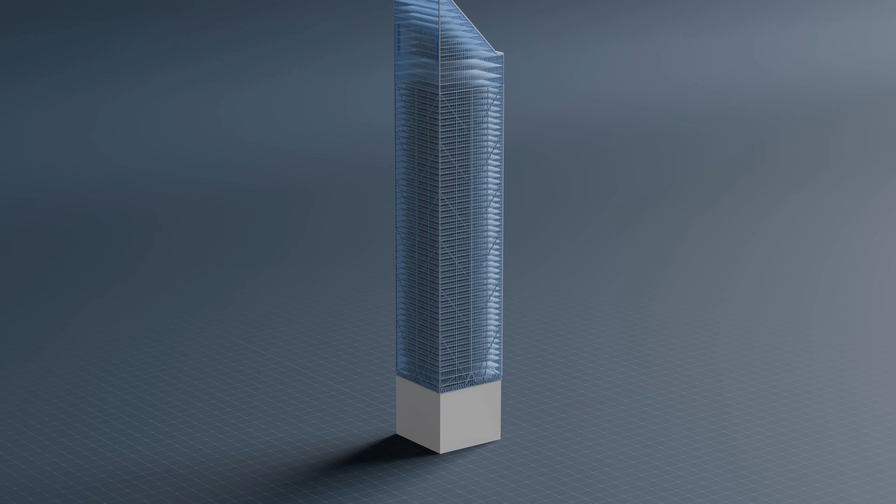Citicorp then hired architect Hugh Stubbins to design the tower and the church, and Bill LeMessurier as the structural engineer. Stubbins explained the constraints they faced. The church needed to be in the exact same spot, and they needed to build the tower around it. If they were to maximize the floor area, they would have to notch out one corner of the tower for the church.

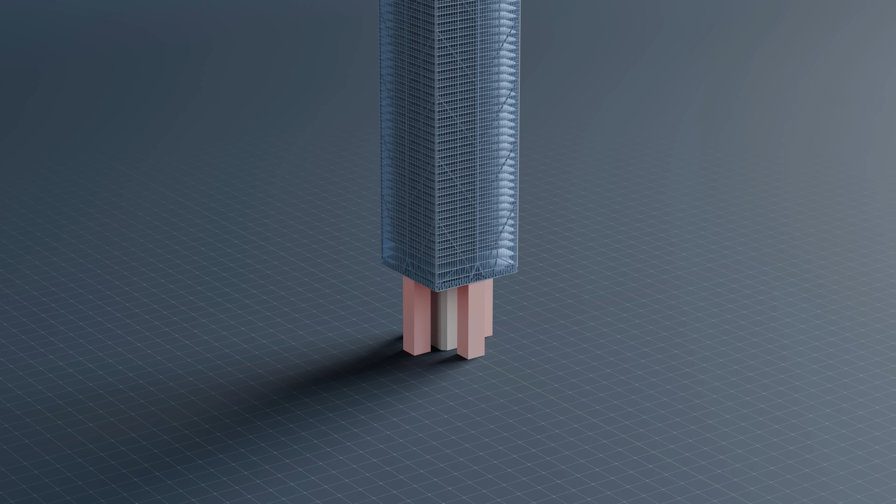LeMessurier agreed that could work, but why not notch 2, 3, or even all 4 corners, essentially constructing the skyscraper on stilts? So it's probably the first time in history that an engineer has come to an architect and said, "Let's make our job harder for us." The stilts would serve 2 main purposes. First, they would need to support at least half of the building's gravity load. The rest would be held up by a larger central column. Second, they would need to withstand the load due to high winds.

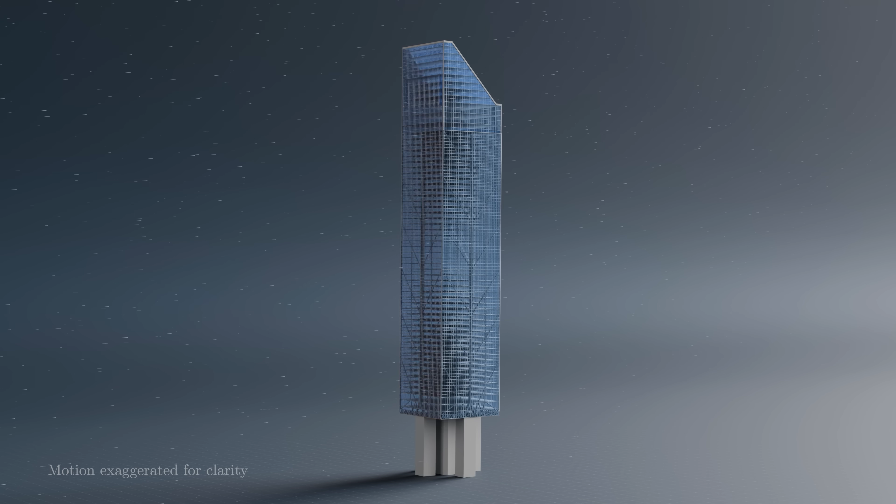But unlike an ordinary structure, the stilts wouldn't be at the corners. They would be at the center of each face. Imagine a chair, and instead of the supports on each corner of the chair, it's at the midpoint of each side. Obviously, it's not an ideal situation. It doesn't seem very stable. Exactly. So it created an engineering problem.

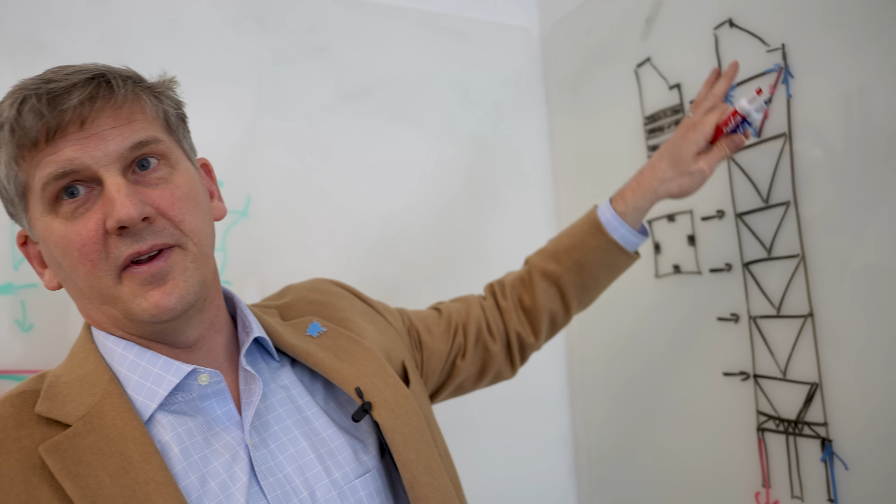As LeMessurier considered the problem, he suddenly had a flash of inspiration. He grabbed a napkin and sketched out an idea. He drew 6 layers of diagonal braces up each face of the tower. These chevrons would transfer the forces to the middle of each face and down to the stilts. Now we have to see the gravity loads, right? But now here's the trick. The gravity loads are coming down the column. When they get to the brace, they need to find their way into the brace.

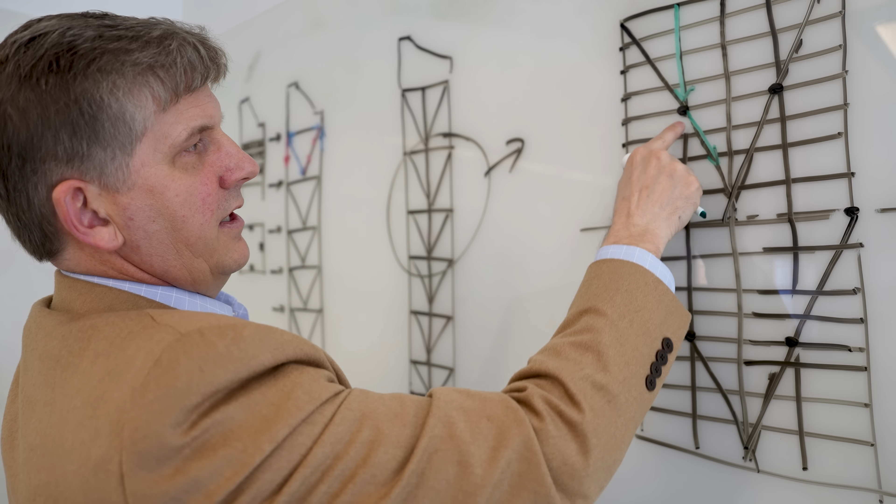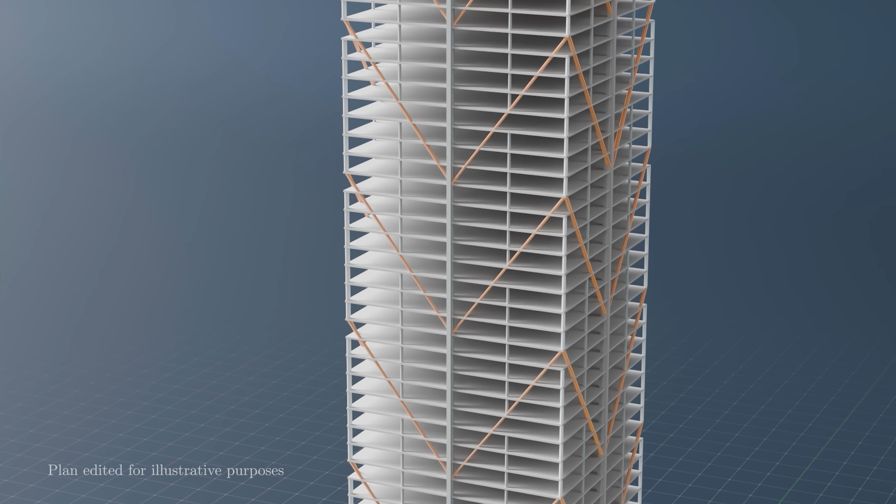Okay. So what you do is you take out that column right there. There is no way that load can jump over and go to that column. And now they're coming down into the braces. They get down to the bottom here, and now they continue to go down. You take that column out. It has nowhere to go except into the brace. By removing the columns at the top and middle of each chevron, every tier acted as a separate unit. They were only connected to the braces and through the central core. So every 8 stories, half of the gravity load would be forced through the chevrons to the mid-face columns, leading down to the stilts.

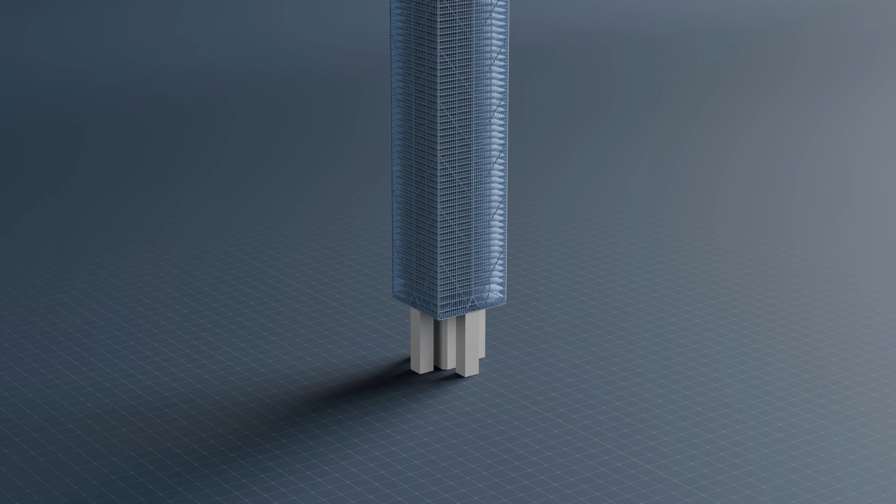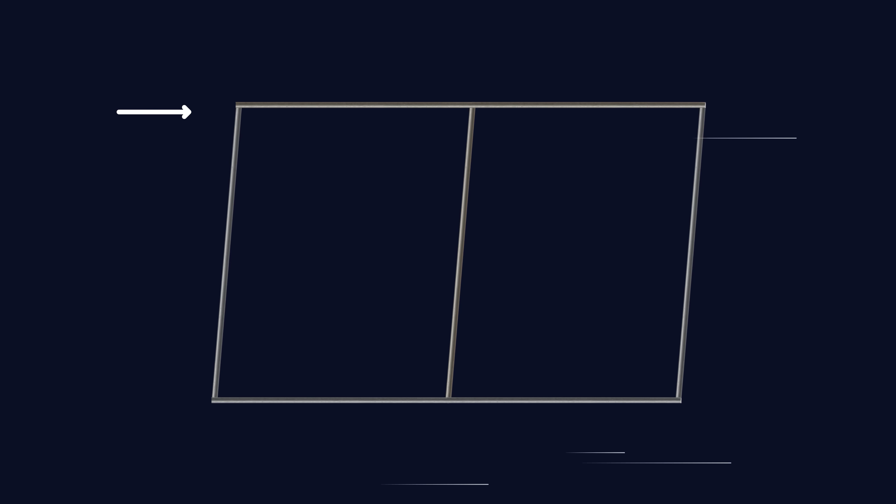Can you tell me how big of a new idea was this? Yeah, well, this particular system was entirely unique, driven by the placement of the columns, driven by the conditions of the building. Satisfied the chevrons could transfer the gravity load, LeMessurier turned his attention to the second problem, the wind. When wind hits the left side of a normal building with corner columns, the entire frame deforms like this. So to reduce this deformation, we could strengthen these joints. But there's a better way.

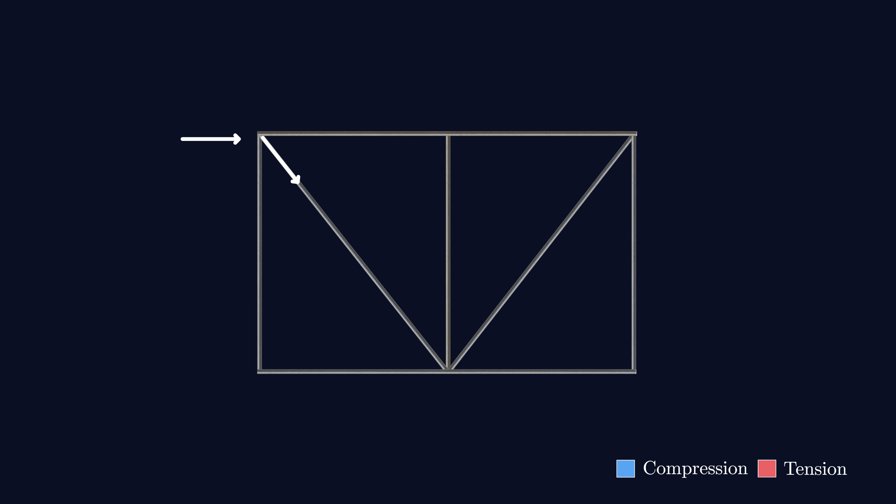Because beams and columns are much stronger in compression or tension than they are with bending loads. So if we add diagonal bracing, they can carry this horizontal load. The beams sort of act like springs, and when they're compressed, they push on the joints. When they're stretched, they pull inwards.

With braces like these, the wind load compresses this diagonal and stretches this one. The left column pulls down in tension, and the right column pushes up in compression. Where the braces meet, they both push the bottom beam to the right. This stretches the left side and compresses the right one.

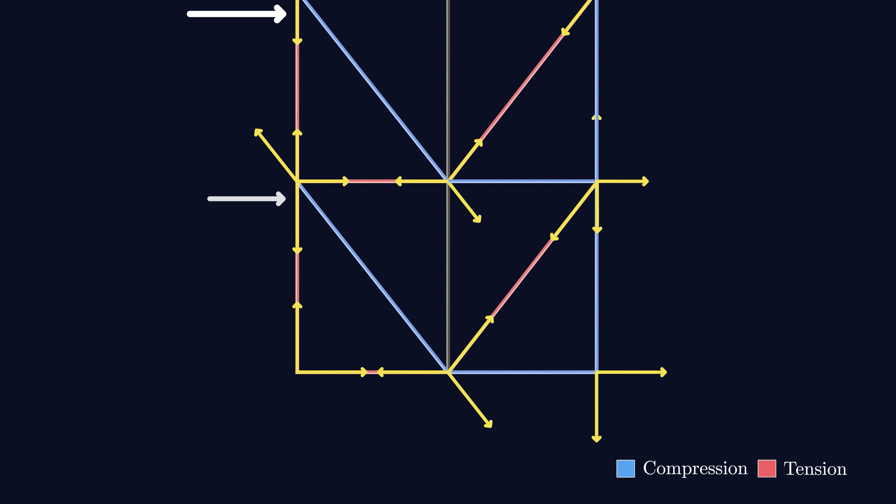But this floor is the top of the next chevron, so this lower section is carrying the force from the layer above it and the normal wind load from the side. And this keeps happening at every chevron, so the wind load builds up as you go down the building.

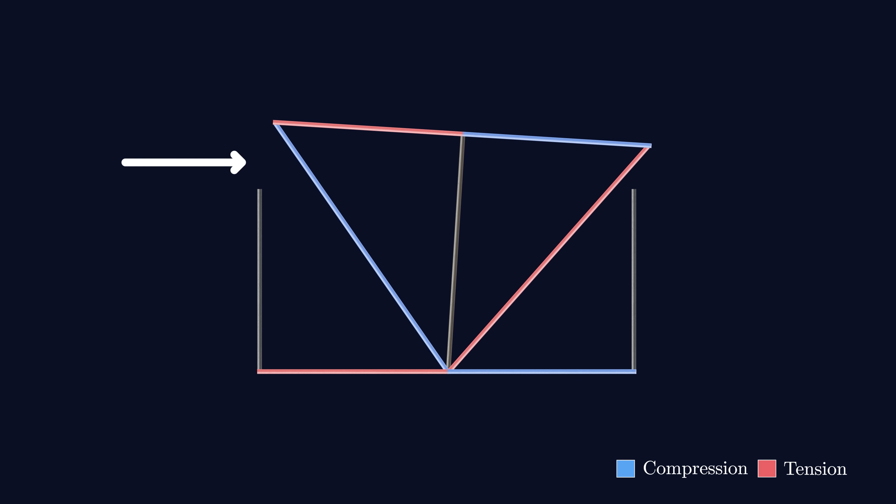But Citicorp can't have corner columns like this because of the gravity load. So in the wind, this entire triangle wants to rotate like this. And to prevent that from happening, this chevron pulls down by going into tension, and the far chevron pushes up in compression. The top and bottom beams are again forced into compression and tension. The wind load ends up wrapping around the entire building, so every chevron works to transfer the wind load to the section below.

When we think about skyscrapers, how big of a deal is wind? If we made a skyscraper here out of all these different things, you push with your phone, you get a certain amount of force. But then you push on my phone as well with a certain amount of force, but your phone is also pushing on my phone. And so that's the shear in the building, what we call the building shear. It increases as you go down the building.

At the 10th floor, you may have a smaller force than at the 60th floor, but the total force of the 10th floor is like carrying everything above it. So it's much bigger than what's going on at the 60th floor.

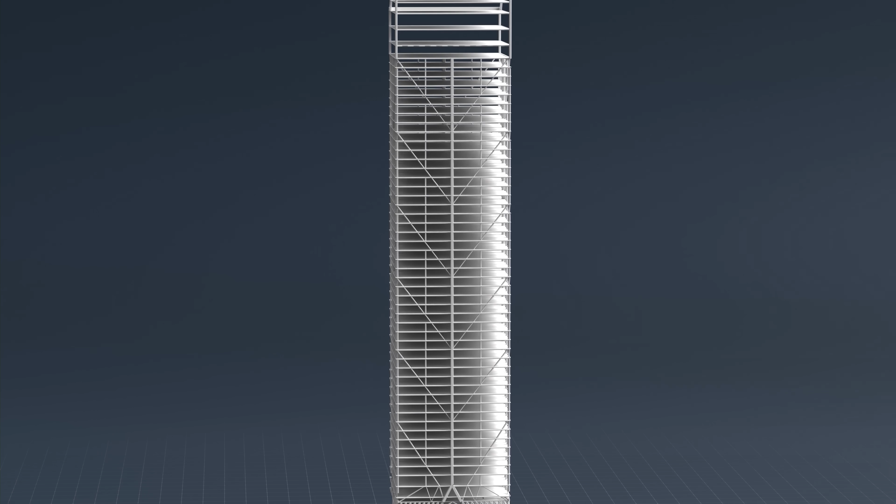So these chevrons were key to LeMessurier's design. But the braces were massive, almost 40 meters long end to end. So even if you could fabricate a steel brace that long, there would be no way to get it through Manhattan. So instead, it was sent in pieces to be welded together on site. The chevron bracing solved the wind and gravity load issues, but it also created a different problem.

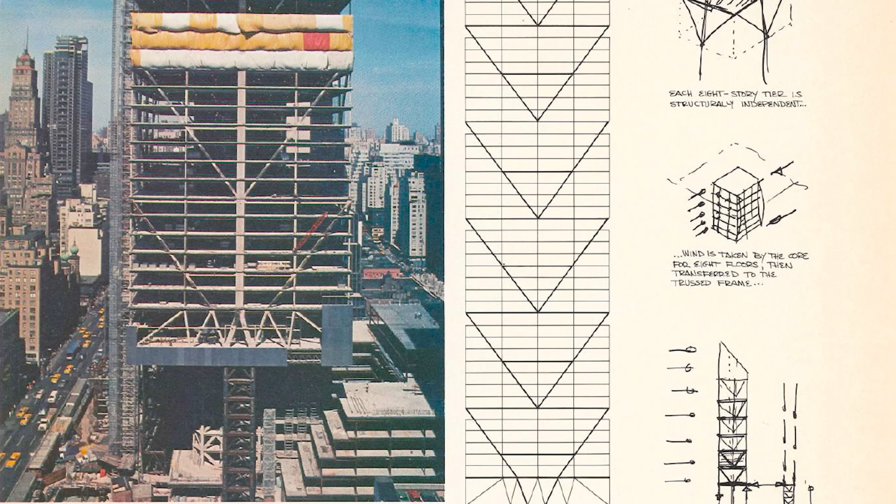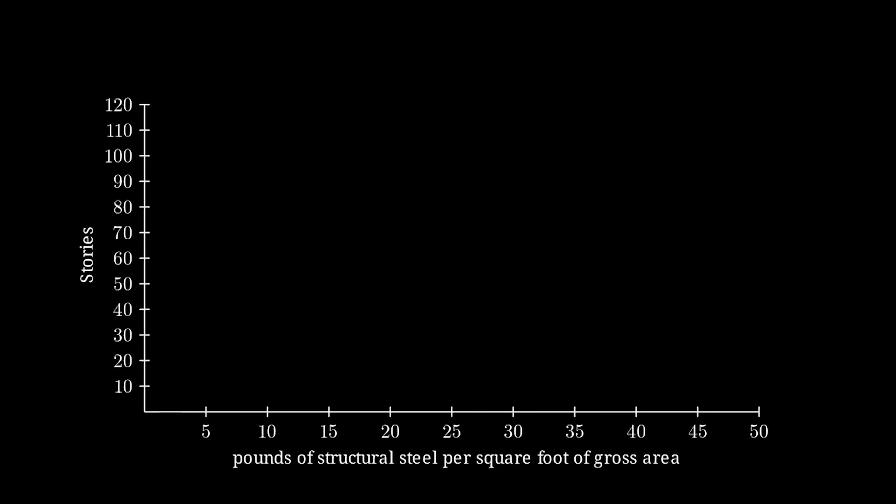Because of the chevron bracing system, they were able to save a lot of money and weight. It was a lighter construct than most other buildings in New York. I think it was 22 pounds a square foot, which is very light. Unfortunately, that made the building swayable. It could move in the wind. That wasn't necessarily a structural problem. It just could have been uncomfortable for the patrons.

The way they could solve this was just, let's add more structural steel and make it a lot stiffer. But the solution that LeMessurier came up with was far more elegant. He adopted something that had been regularly used in bridges, power lines, and ships, but never before in a building: a tuned mass damper, or TMD.

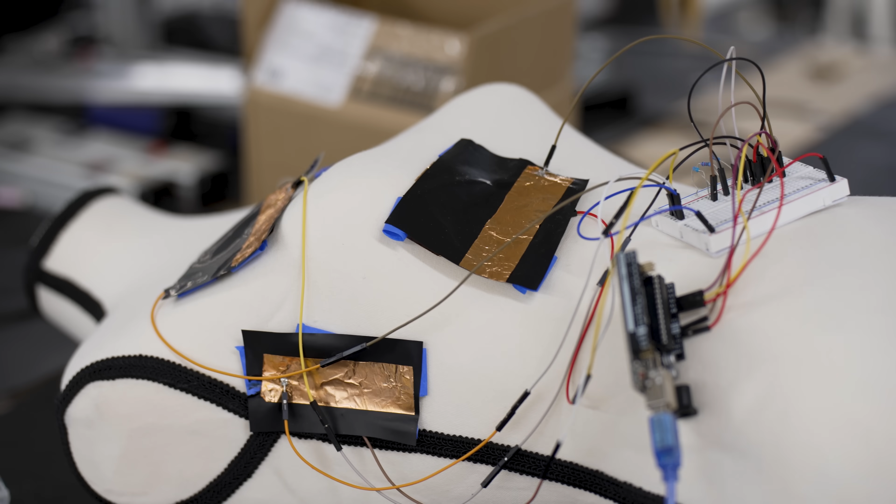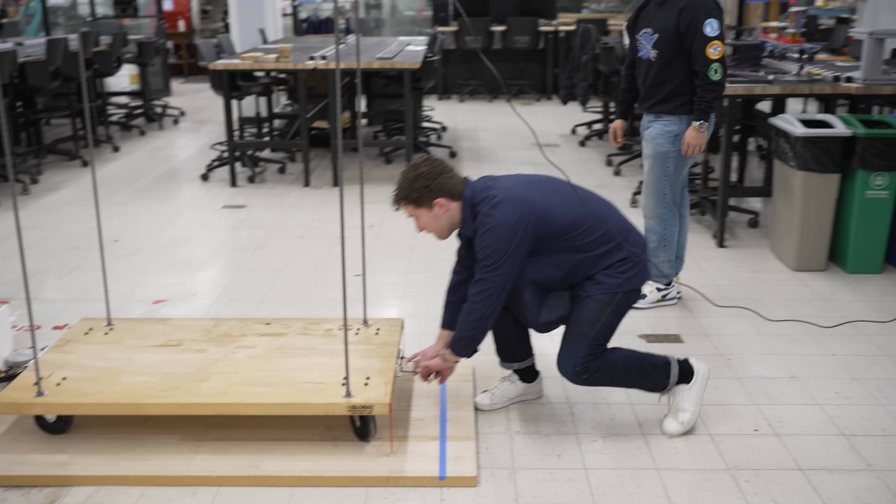So we're here at Stark Laboratories, and I'm not with Iron Man, but instead the Columbia Space Initiative, a student team here on campus who has helped us build this incredible tuned mass damper kind of system. We'll use this cart to represent a building. By pulling it back and releasing it, we can excite its resonant frequency. And then we'll put on a little pendulum, an aluminum rod, and a mass at the bottom.

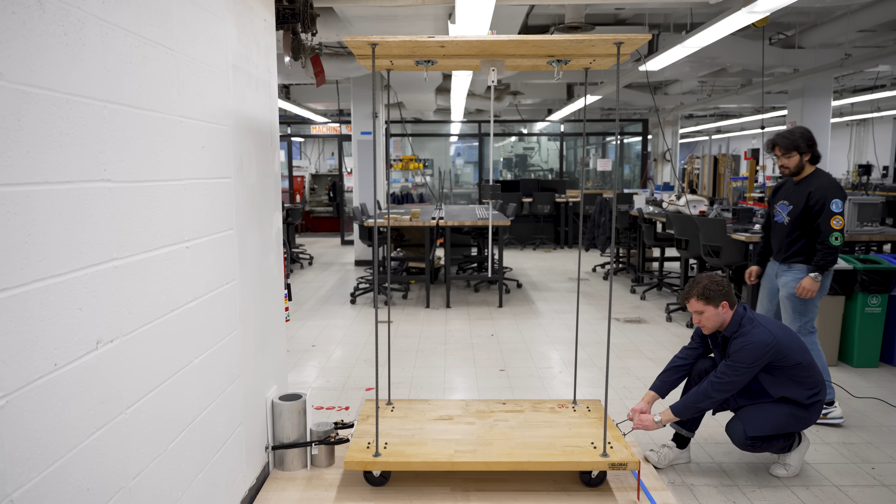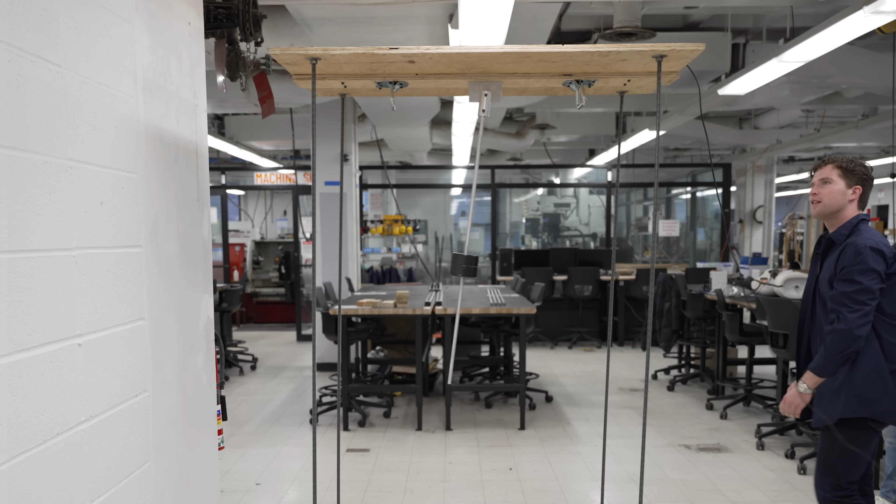As the building sways, it transfers some of its kinetic energy to the pendulum, which starts to swing. Then some of its energy is dissipated through friction at the hinge. The pendulum and the building oscillate out of phase from each other, so every time the building pulls the pendulum in a different direction, more energy is lost, significantly damping the sway of the tower. But this system needs to be carefully tuned so it has the same frequency as the building itself and the right amount of friction.

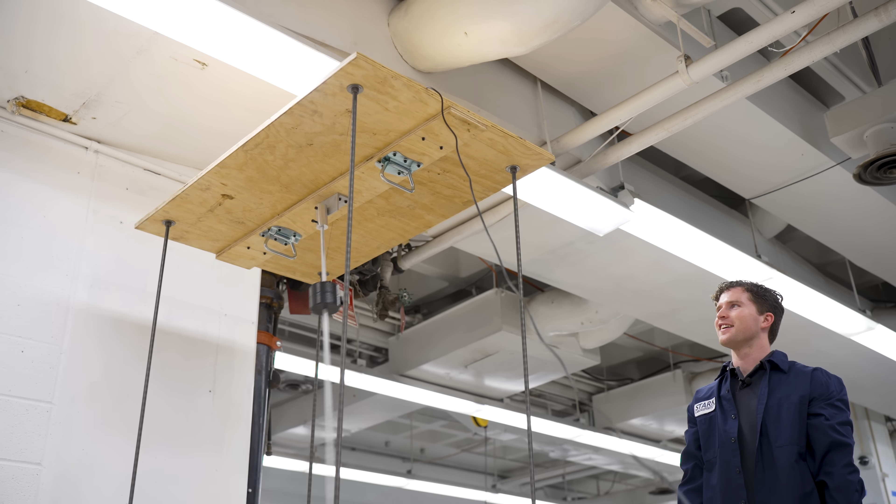So first, the mass needs to be at least 1 to 5% of the building's weight to be effective, and we tune the frequency of the TMD by adjusting the length of the pendulum. I assume engineers do math around this thing, but we're just doing it by feel.

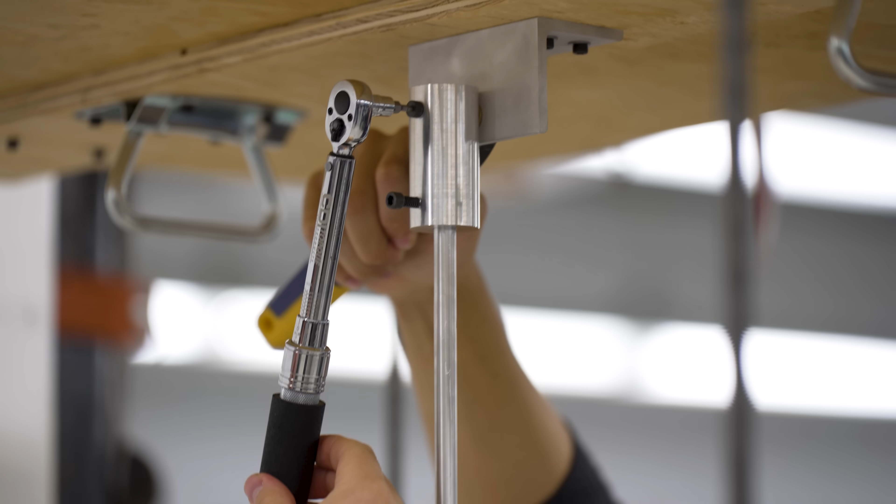Second, by loosening or tightening the bolt, we can tune the amount of damping. We need to dissipate more energy from friction at the hinge to stop the swaying faster. We just tighten this top bolt to add a little bit more resistance to the whole system. And we'll see if we can dampen it now further.

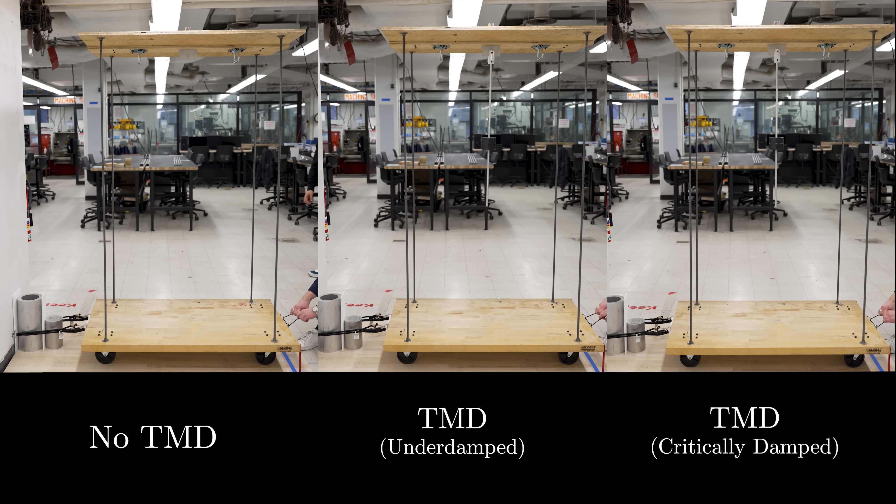Ooh, much different, yeah. Yeah, that looked great. That was so quick. Yeah, that was. It is cool when an experiment works.

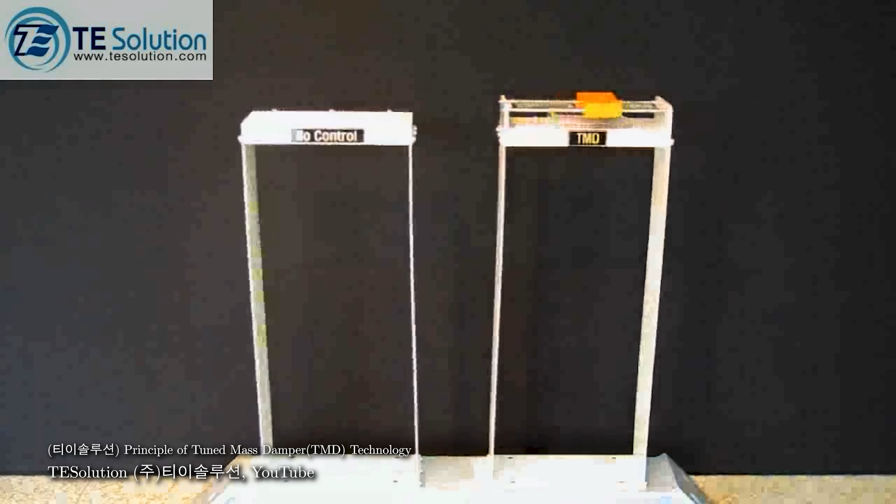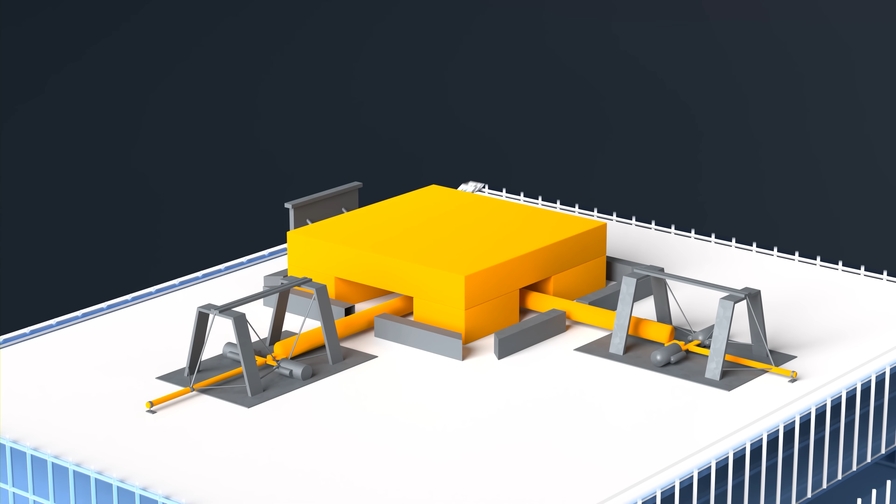Does not always happen. There are many different types of TMDs, like pendulums, liquid columns, and a large mass on springs. LeMessurier used this last one in Citicorp. What you see is a mass of concrete, which is 29 feet square, and about 8 feet thick and weighs 400 tons. It was installed on the top floor, and it's affectionately known as that great block of cheese.

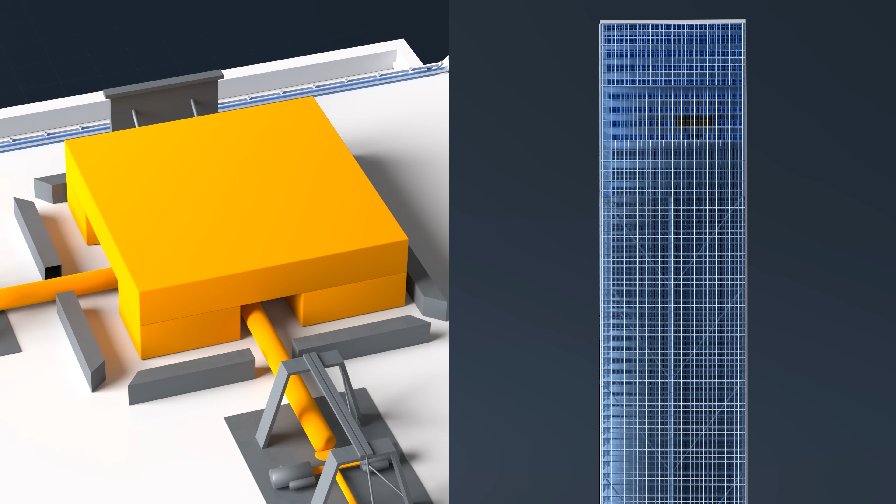As Citicorp sways to one side, the block starts to move in the same direction. Some energy is dissipated through separate viscous dampers. Citicorp's oscillations are damped through those energy losses as the block oscillates out of phase to the building's motion. LeMessurier expected the damper to reduce the amplitude of swaying by roughly 50%, and he saved around $4 million by not needing an additional 2,800 tons of structural steel.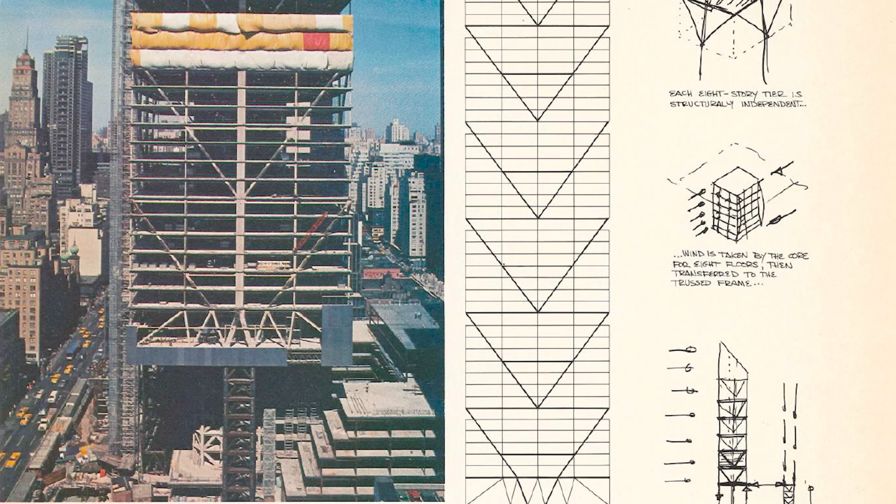With both the chevron bracing to channel forces to the stilts and the tuned mass damper to reduce sway, Lemessurier was convinced the building was structurally sound. On Citicorp Center's opening day in 1977, it was the 7th tallest building in the world. It was described by the press as an acrobatic act of architecture.

Later, the American Institute of Architects even gave it an honor award, calling it a tour de force as a stylish silhouette in the skyline, and for the pedestrian, a hovering cantilevered hulk. So then it's going swimmingly for years, right? Well, it's going swimmingly for about a year. But the first hint of trouble came in May 1978.

Lemessurier was talking with another client about welding similar chevron braces. The architect and the steel fabricator said, "Tell me, how did those welded braces work out? Seems like overkill," they thought. And Lemessurier says, "Yeah, they were fine. Let me call my guys in New York and I'll check."

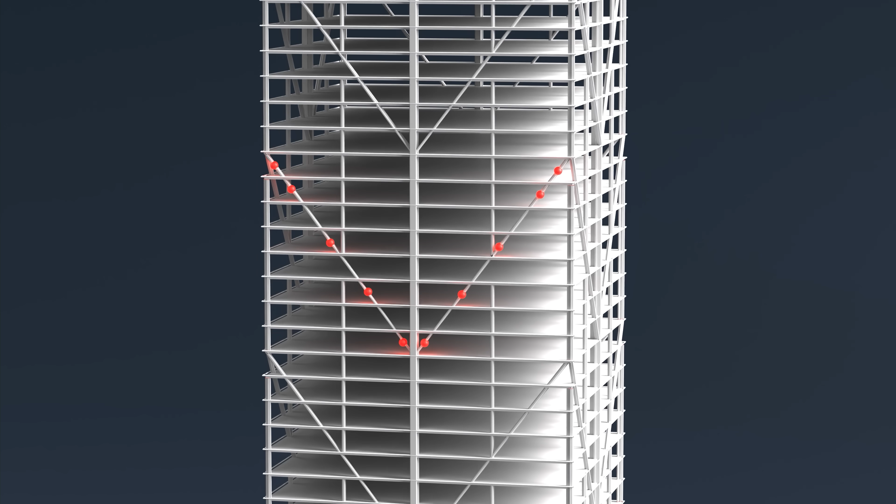So he puts a call into his office in New York, and they say, "Oh, Bill, didn't you know? We bolted those connections." The contractor had suggested saving $250,000 by using bolts to attach the braces instead of welds, and Lemessurier's firm had agreed. There is nothing that says a bolt is inherently worse or better than a weld. You use them in different circumstances for different reasons.

But it's a little surprising to find out. I thought the connections in this tour de force, one-of-a-kind skyscraper, that's on the cutting edge of structural engineering, were connected one way, but apparently it's connected another way. But if the braces are going like this, where are they going to go? You only need the weld when the braces are going like this.

Since the gravity load was always compressing the braces, some of the chevrons only went into tension under very high winds. And even then, it wasn't a lot of tension. Lemessurier trusted that his team did the right calculations, and the substitution was fine, logical even.

But around a month later, Lemessurier got a phone call from a student who wanted to ask some questions about the Citicorp Center. And his teacher said to him, "That engineer didn't know what he's doing, and nobody should put the columns in the middle, they should put them in the corners. That's silly." And I told the student, I said, "Well, your professor's full of it. He doesn't understand the problem we had to solve." Lemessurier went through the calculations with the student to reassure him the stilts were in the right place.

But the interesting thing is in that moment, he's thinking about wind loads from all directions. Late spring, early summer of 1978. Bill Lemessurier is working on the Back Bay Hilton Hotel that in plan forms a triangle, not a rectangle. Now you got a triangle, what's your orthogonal direction? You just have to give up and say, we're going to analyze it from every direction. That's going on the moment that Bill Lemessurier gets this phone call.

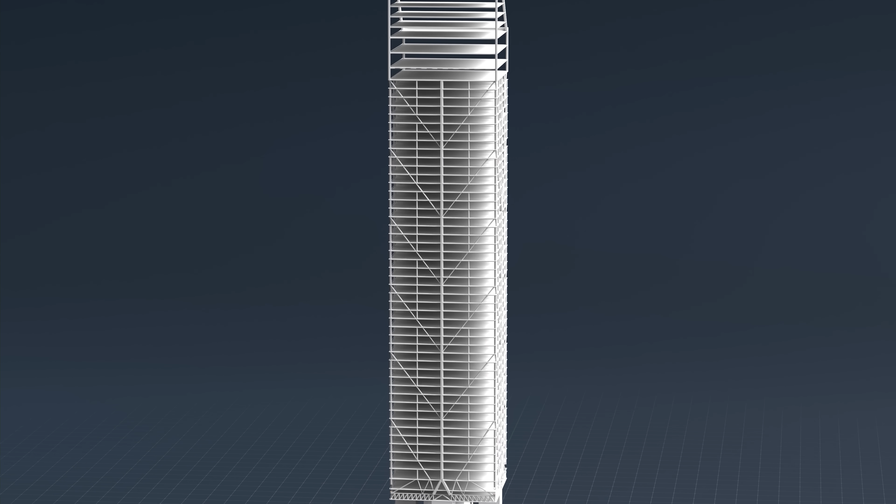Compared to Lemessurier's calculations for the perpendicular wind load, the forces here were 40% higher. So 1.4 by itself is not enough to wreak havoc, okay? It may be, but it may not be. Okay. So then the question is, well, what happens? This increase in forces wouldn't have mattered in the original design since the chevrons were fully welded together. But that wasn't the case anymore.

Lemessurier remembered his earlier phone call. The welds holding the chevrons together were swapped for bolts. How did his team calculate the number of bolts per joint? Did they consider quartering winds? It would be a miracle if they ever thought that through, to think about the diagonal wind. It just wasn't in the nature of anybody. So I had a bit of a worry. I didn't panic right away, but I decided to go down to New York to my office.

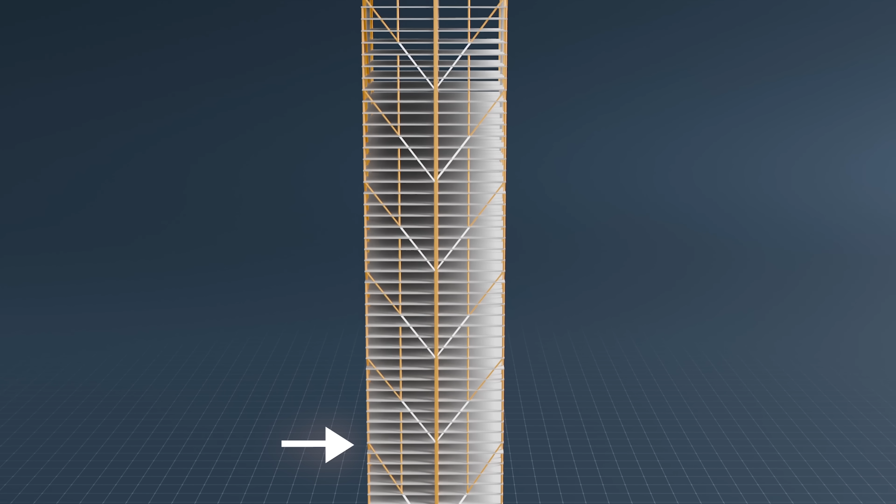Lemessurier requested the building diagrams and pored over all of the connections. He looked at how his firm calculated the number of bolts. There was no question they had taken the straight-on wind, not the diagonal wind. Although wind speed is highest at the top of the tower, the wind shear builds up as you go lower.

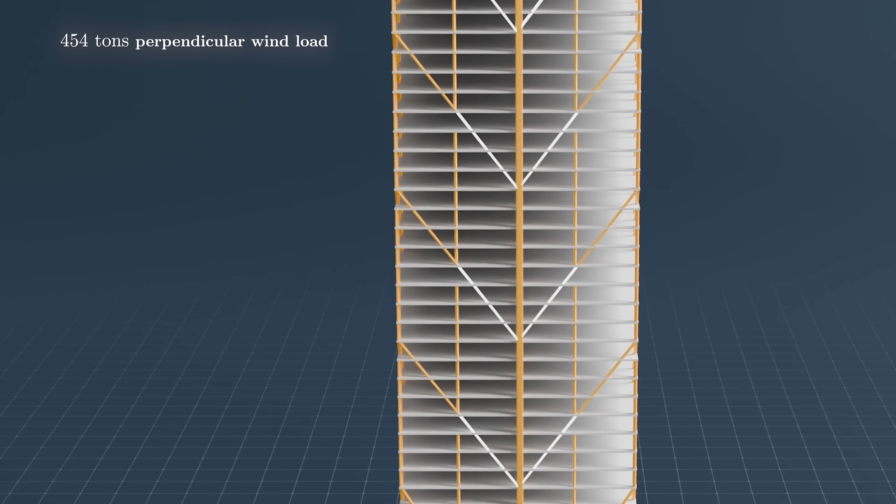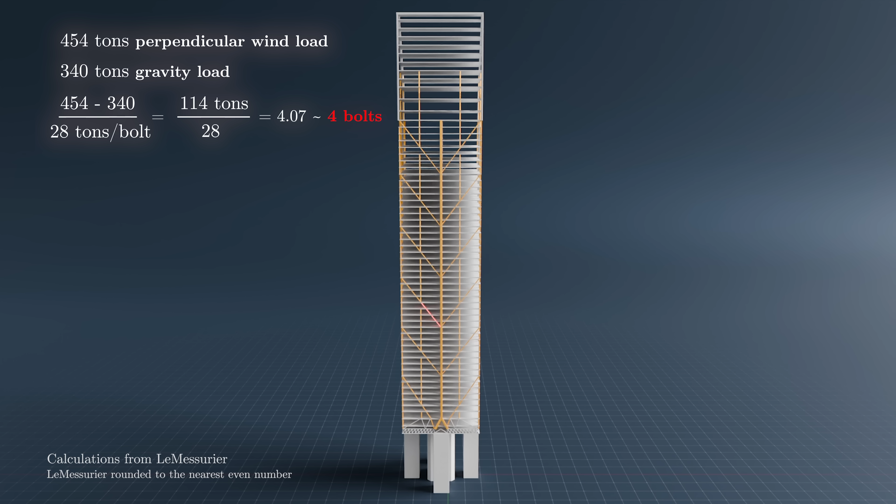Looking at this brace around halfway down the tower, the perpendicular wind load is 454 tons. Because of the skipped columns, all of these braces carry the same gravity load, just 340 tons, from the 8 stories above. The gravity load builds up in the center column, not in the braces, which means there are 114 tons of tension in this brace. If each bolt can withstand around 28 tons, that would require 4 bolts. The original calculations said just 4 bolts were enough, so that was all they used.

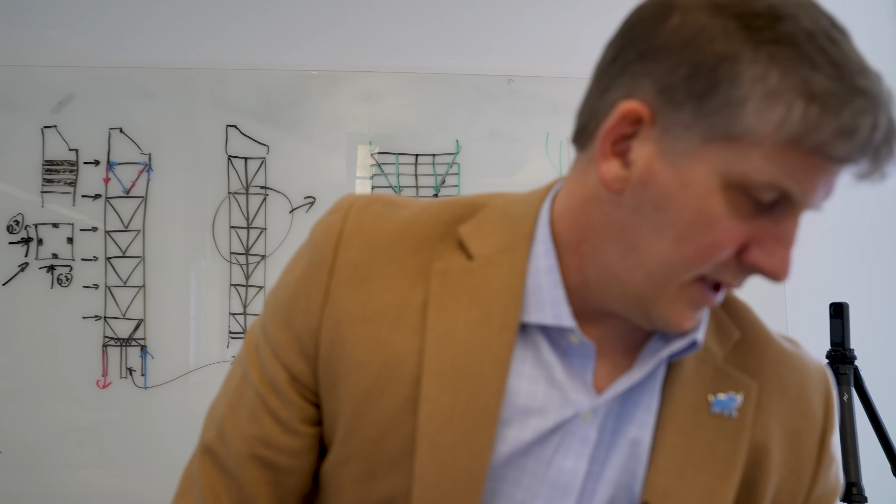But when he added quartering winds, Lemessurier's calculations showed there were some braces that needed far more bolts. At this particular part of the building, which I can show you on my calculations, is right about here. And Bill Lemessurier talked about the 30th floor. I always wondered, why was it the 30th floor? The 40% increase from quartering winds means that this brace has a wind load of 635 tons. The tension in the brace is now 295 tons, over double the original calculation. So these braces actually need around 10 bolts, not 4.

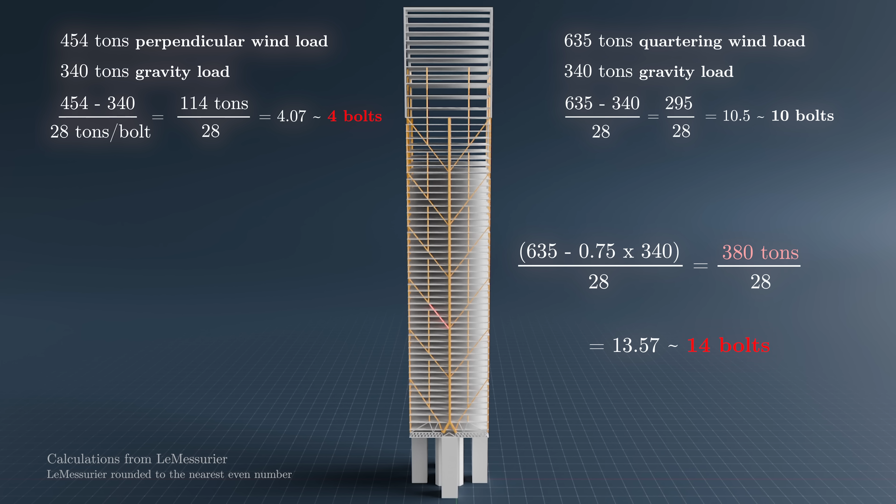But then it turned out they had done something else. Lemessurier's firm considered the braces to be minor structural elements. They didn't use the right factor of safety to calculate the number of bolts. They should have overestimated the tension in the brace by underestimating the gravity load. With only 75% of the gravity load, the tension in the beam is now 380 tons. So they really needed 14 bolts, but they used only 4. This thing is in real trouble.

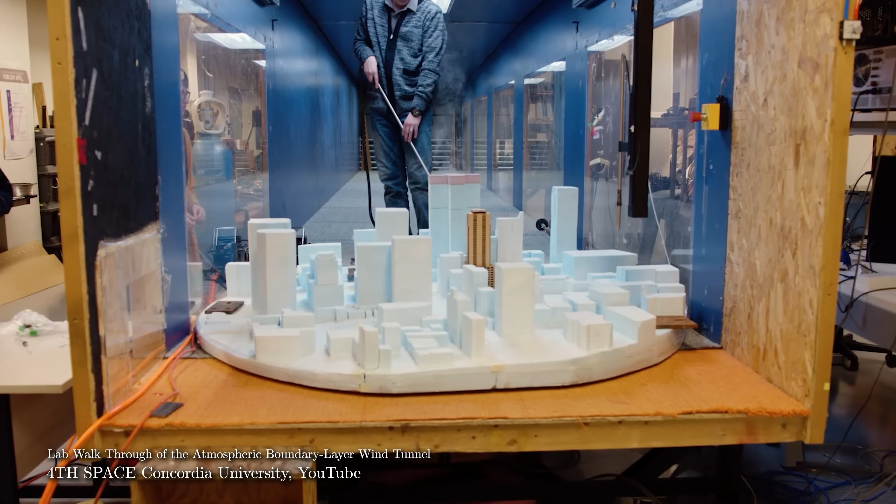Imagine what Bill Lemessurier was thinking at that moment. You see that number and you're like, oh my God, this is serious. It's really serious. Lemessurier was starting to panic. He didn't want to rush to conclusions, so he flew to Canada to check his calculations with Alan Davenport at the Boundary Layer Wind Tunnel. After running more tests, they found that it was even worse than Lemessurier thought.

The estimated 40% increase in stress was technically correct, but Lemessurier made his calculations assuming the building wasn't moving. This is called static conditions. But the wind tunnel gave Lemessurier a dynamic analysis, how the forces change when the building is moving around. To Lemessurier's horror, the wind tunnel analysis showed that the stresses could increase up to 60% more than originally anticipated.

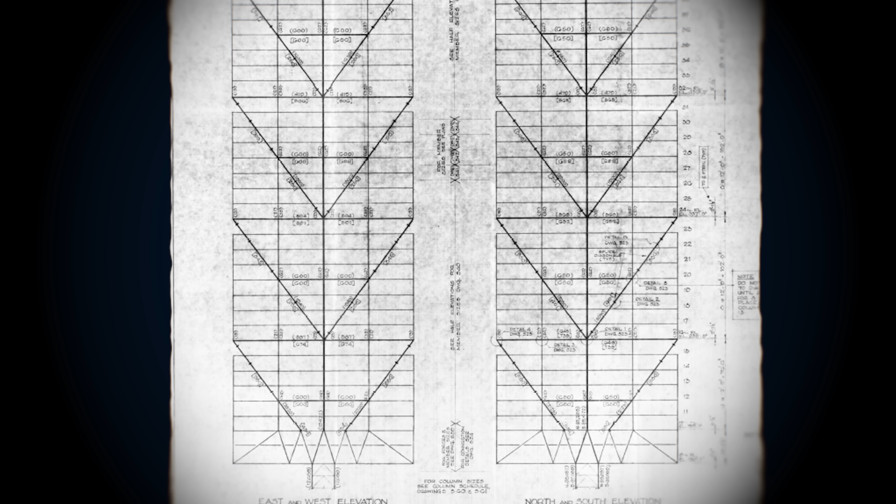LeMessurier squirreled himself away in Maine and worked through the data from the wind tunnel again, joint by joint on every floor. The weakest joints were at the building's 30th floor. If those failed, the entire building would fall. But what were the chances that a storm strong enough to topple the building would pass through New York City?

LeMessurier dug through the historical weather reports. On average, a storm strong enough to tear the building apart occurred every 67 years, but only if the tuned mass damper was working. If a storm knocked out power, then even 110 km/h winds blowing for just 5 minutes would collapse the building. In any given year, the chance of a storm that size happening was 1 in 16.

Just 1 year before Citicorp was completed, wind gusts of 110 km/h roared through New York City as Hurricane Belle passed through. What do you think this moment was like for LeMessurier when he ran these calculations? It must have been devastating. I can't imagine the fear. I can't imagine the feelings. It must have been truly a moment he never thought he would live through.

That building was going to fall down in my lifetime. And since this was July, it could fall down the summer of 1978. LeMessurier needed to decide and decide fast. But revealing this mistake could mean lawsuits, bankruptcy, and professional ruin. He could stay silent, only Davenport knew, and he wouldn't reveal anything, or he could entirely disappear.

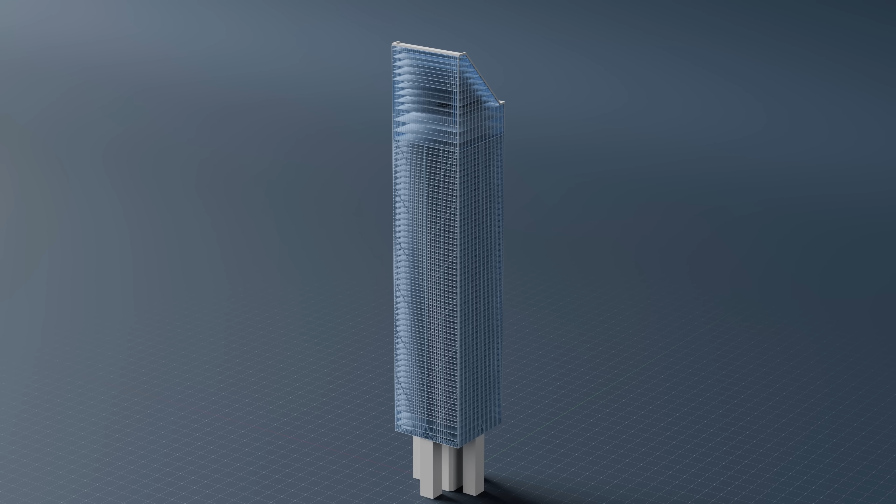After speaking to a few lawyers and other engineering experts, LeMessurier told the architect Stubbins, and together they informed Citicorp's chairman, Walter Wriston. Within hours of that meeting, LeMessurier acquired emergency generators for the tuned mass damper. The TMD was originally designed to stabilize any swaying for comfort, but now it became the crutch that the tower leaned on. LeMessurier pinned all his hopes on it. He called the confidential repair plan Project Pandora. But that sounded ominous, so he came up with the Special Engineering Review of Events Nobody Envisioned, or Project Serene for short.

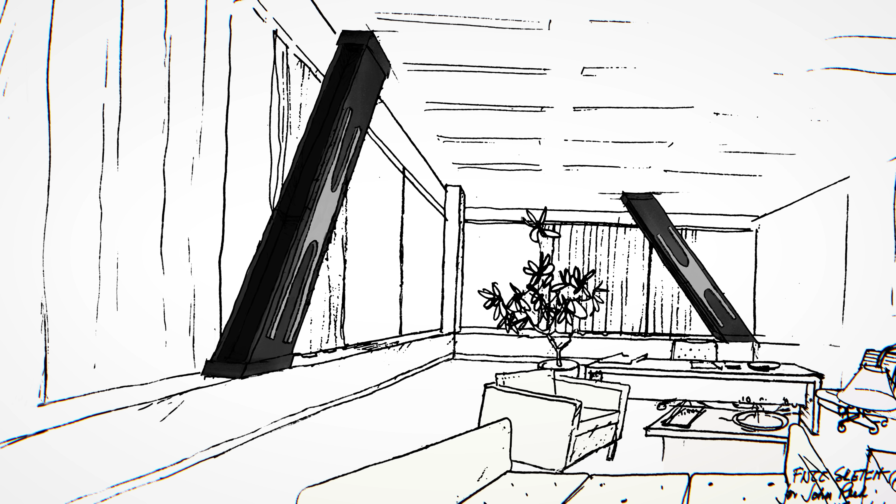Each night, welders would enter the building after everyone left, rip off the sheetrock around the chevron beams, and then weld two 5-centimeter thick, 2-meter long steel plates on each joint. Like Band-Aids, literally Band-Aids on both sides of these joints. After, they'd replace the wall and clean everything up before the office workers came back the next morning. They needed to weld over 200 joints, and LeMessurier ranked them by importance, starting with the ones on the 30th floor.

But the repairs wouldn't be completed before hurricane season, so Citicorp worked with the Red Cross to develop a 10-block evacuation plan. How many people were at risk in the building, and if it fell, would it affect other buildings? Were there chances of it leading to something more disastrous? Absolutely. This would have toppled into another building, which would have toppled into another building, which would have continued a horrific process. So it was untold what the ultimate effects could have been.

Just the evacuation plans were how many people? Thousands. The building itself housed thousands. And then the residents and the businesses surrounding the building, it was into the thousands. Despite the risk, they decided not to tell the public, or even the office workers in the building. No one wanted a mass panic.

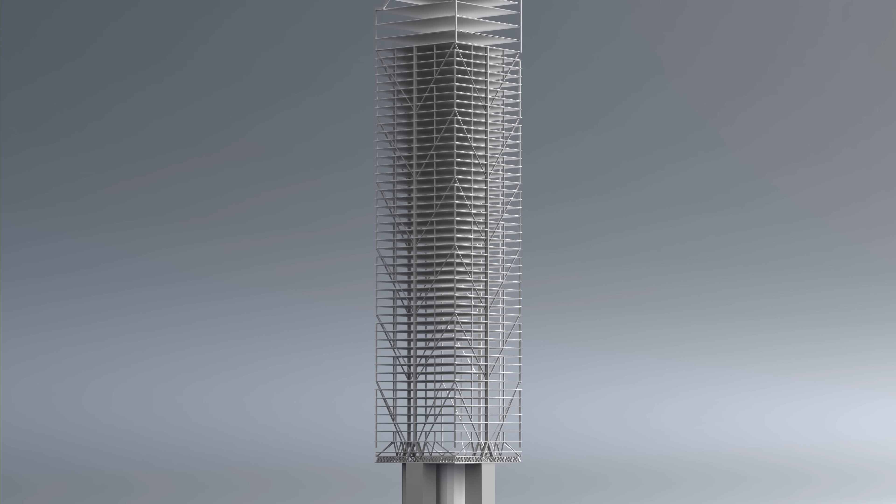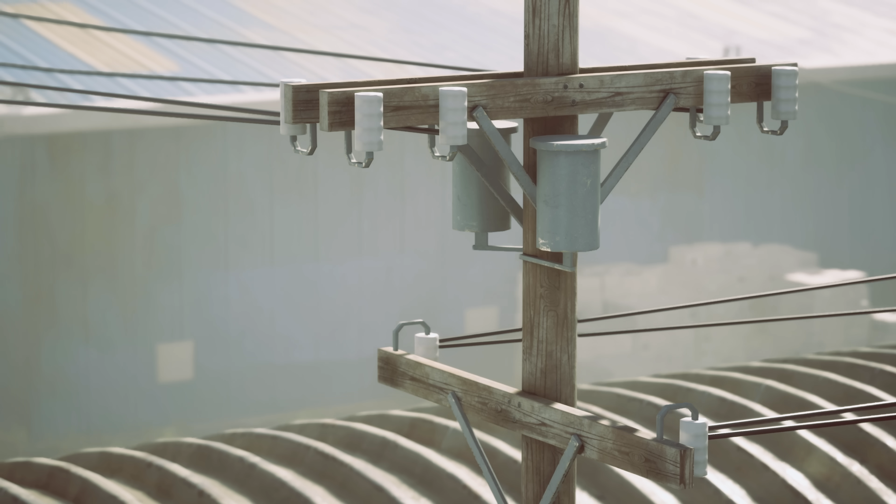Instead, they fitted strain gauges on important structural members. The gauges monitored the skyscraper's every bend and twist from a comm center 8 blocks away. At least that would give them a little bit of warning. But this plan required new telephone lines, and the phone company wouldn't get around to doing this for months. So Citicorp's chairman immediately called AT&T's president, and the lines were installed the next morning.

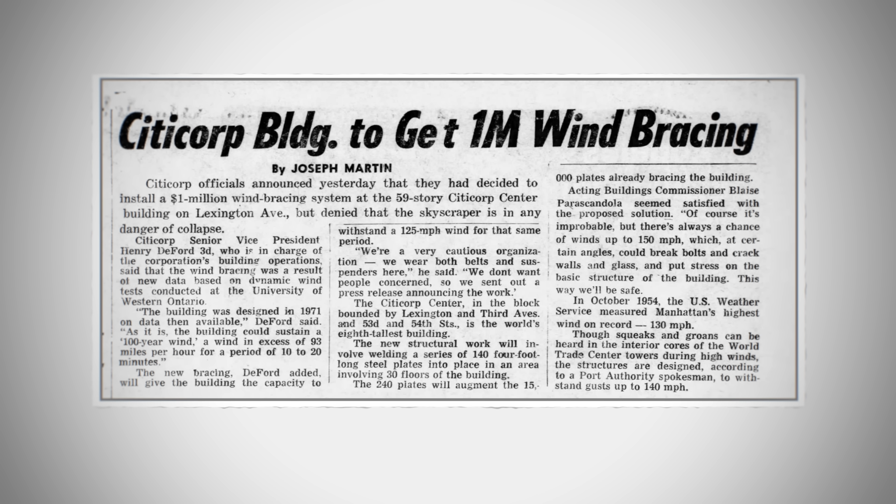But even though LeMessurier tried to keep Project Serene under wraps, people started asking questions. On August 8th, Citicorp released a statement about the repairs. No, we had to cook up a line of bull, I'll tell you. And white lies at this point are entirely moral. You don't want to spread terror in the community to people that don't need to be terrorized. We were terrorized, no question about that. Several newspapers reported on it, but they didn't have the details.

Then, LeMessurier got a message. The New York Times was trying to reach him. If he didn't respond, they would know something was up. So I mixed a martini for myself, and it's 1 minute past 6. I dialed the New York Times. They pick up the phone. It's a tape recorder saying, "The New York Times has gone on strike as of 6 o'clock."

Not only did the New York Times go on strike, but all the newspapers in New York went on strike until October. So we had a press blackout, and that was the greatest thing that ever happened. The press was off their back, and the weather was beautiful. The repair work continued smoothly. But late August brought the news everyone had been dreading. Hurricane Ella starts brewing in the Caribbean, and this is the one storm that they're nervous about. The repairs were halfway done by now.

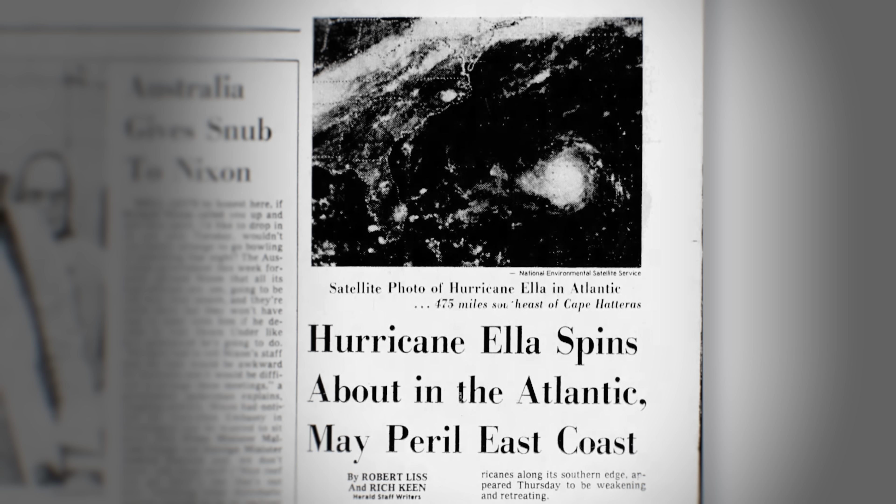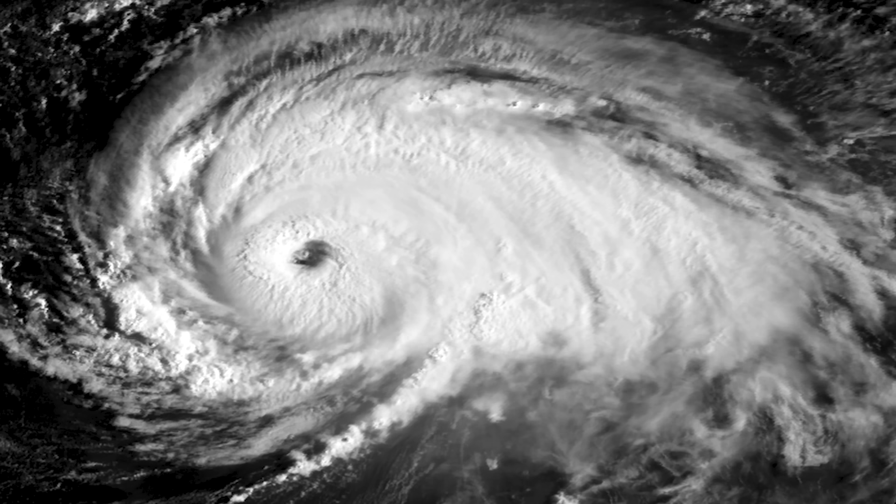I think it was a 1 in 200 year storm that it could withstand, but LeMessurier wasn't taking chances because he didn't know the intensity of the storm, and this was a strong storm. So there was a chance. There was absolutely a chance, and they had to prepare for that chance. By Friday, September 1st, Ella was making her way toward New York with winds reaching 200 kilometers per hour. City officials braced to start the evacuation. Police would go door to door to get everyone out within a 10-block radius.

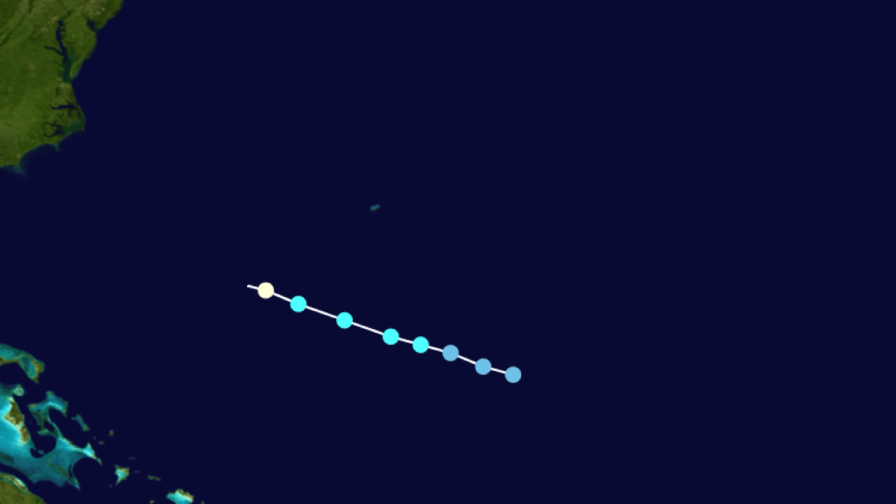For 24 tense hours, Ella stalled around North Carolina. Like LeMessurier said, we were sweating blood. But sometime in the night, Hurricane Ella veered off into the sea at the last minute. It intensified and hit Canada with peak winds of 225 kilometers per hour. But Citicorp was safe. LeMessurier described that next morning in New York as the most beautiful day that the world's ever seen.

They completed the repairs in October, just 6 weeks after LeMessurier told Citicorp. Now, the building, according to LeMessurier, can withstand a 1 in 1,000 storm. The repairs cost between $4 and $5 million, but LeMessurier argued that Citicorp approved an earlier building design that cost $5 to $6 million more, so they were willing to spend that much on the skyscraper anyway.

And for almost 2 decades, the secret was confined to a small inner circle. But in 1995, the New Yorker finally brought Project Serene into the light. Far from being vilified, LeMessurier was praised for owning up to his mistake and fixing the issue as soon as possible. After the article, New York updated the building code to require quartering wind calculations. And since that first damper in Citicorp, TMDs have spread across the globe, allowing architects to push skyscrapers taller and slimmer.

It's the first tall building in the world ever built with mechanical help to make the structure work. That's remarkable. Incidentally, that has been now copied 100 times in Japan. This is ubiquitous, and when I go to Japan, I'm treated like a tin god because I'm the father of the tuned mass damper. I said, really? Of the 20 tallest buildings in the world, 6 include a tuned mass damper, and they're especially critical in typhoon or earthquake-prone regions. For example, Taipei 101 has a massive 660-ton pendulum that stabilizes the building.

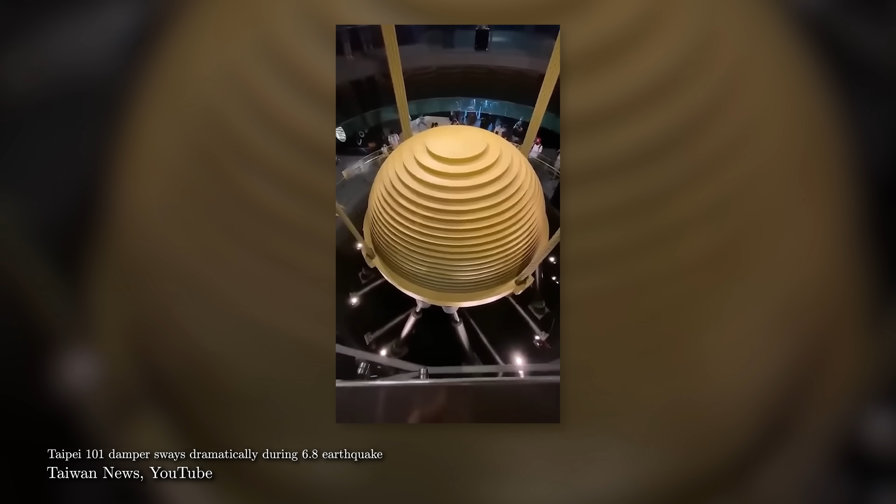It can withstand up to 200 km/h winds and earthquakes with magnitudes over 6.8. But the legacy of this building is still steeped in controversy. First, who was the mysterious student that started it all?

I think it was spring of 1978. There's a student at Princeton, an undergraduate student by the name of Diane Hartley, and she's studying structural engineering. It was time for her to consider a senior thesis, and they decided that a study of the new Citicorp tower would be wonderful. It's a remarkable thesis. It contains a lot of the original engineering calculations by the engineers.

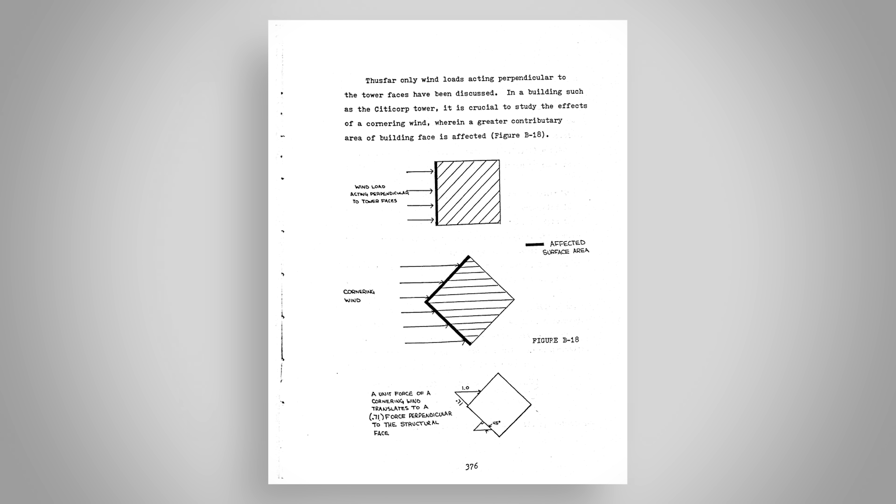She's looking through the documentation, where did they consider quartering winds? And she's not seeing it. And I must be wrong, she says. She's just an undergraduate student, and you guys are award-winning structural engineers. The engineer explains to Diane Hartley, quartering winds are not a factor in this building. So she's satisfied. She graduates, that's it. Doesn't think about it again.

But a year after the New Yorker article, the BBC released a documentary on the crisis. And so she was holding her baby, and she turned on the television, and lo and behold, she heard them reference a conversation with a student, an engineering student from New Jersey, reaching out to Lemessurier. And she said, I almost dropped my baby.

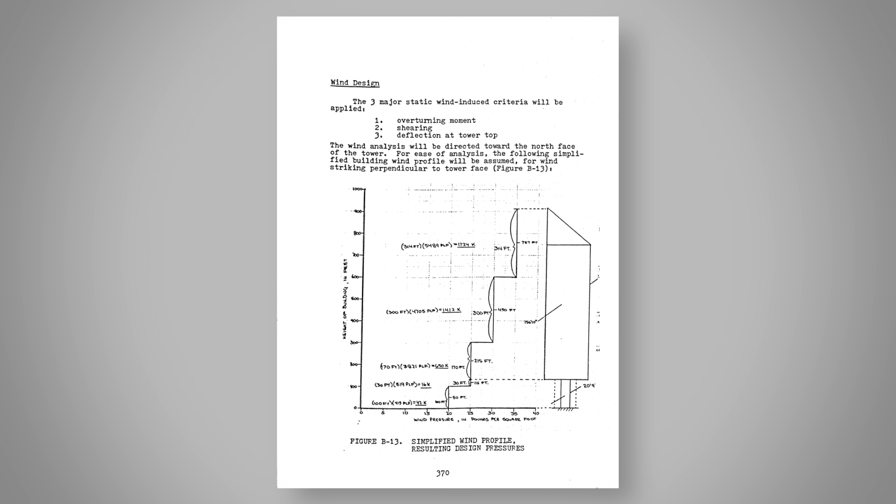And then so she just assumed, for years afterwards, that it wasn't her because she didn't speak to Lemessurier. But then in 2003, her thesis advisor told Diane that he checked all the other New Jersey engineering and architecture programs, and no one else was working on a project about Citicorp in 1978. She was the only one.

She never spoke to Lemessurier personally. She never claimed to speak to Lemessurier personally. The assumption was that either Lemessurier was mistaken and that it was Diane Hartley who made the call, it was a female, or more likely that Lemessurier was basically tipped off by his New York engineers.

Then, in 2011, a man named Lee DeCarolis came forward. And the phone call, as we understand it, came from a student at the New Jersey Institute of Technology. His name is Lee DeCarolis. He's not asking for money. He's not asking for fame or glory. He's just saying, this is interesting, and I'm the guy who made this call. And he said, yeah, I had a conversation with Bill Lemessurier, and he pretty much lined up with what Lemessurier himself said. Sadly, Lemessurier passed away in 2007 before he could confirm the student's identity.

Believe it or not, 40 years later, I learned there's a lot of raw feeling still on this. People aren't anxious to talk about this, especially people that were involved in it. Even people that weren't involved in it, but were tangentially involved in it. We reached out to Lemessurier Associates, and they refused to respond to our request. You'd think that they would, the namesake for their company stood up and did the right thing, but I don't think they want to be associated with mistakes.

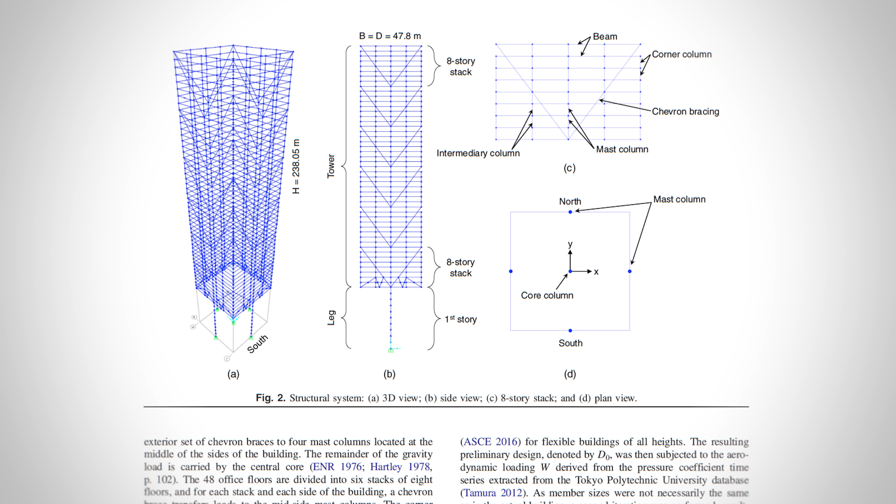Further questions arose in 2021 with a new study from the National Institute of Standards and Technology. They wanted to see if quartering winds were more demanding for a building like Citicorp. Although they did conclude that the pressure from perpendicular winds was greater, their analysis didn't include any internal structure specific to Citicorp. As for Lemessurier, the engineering field still regards his actions as upstanding, and the Citicorp case is taught all over the world as a case of good engineering ethics. In fact, in my own engineering ethics course, I learned about the Citicorp building.

And every structural engineer experiences this. When you actually feel the weight of the responsibility, you're saying, based on my engineering, that building is going to stand up. Nobody else worries about it. And so if you think about the emotional pressure that Bill Lemessurier was under, and then needing to come back and do something about it and to mobilize and to hold that during this entire process, it's truly a remarkable story. I mean, I can't imagine it.

I can't imagine it. I said, look, if you got a license from the state and a certification from a university, and now you're going to use that license to hold yourself out as a professional, you have a responsibility beyond yourself. If you see something that is a social risk, good heavens, this thing would kill thousands. You must do something. You must do something.